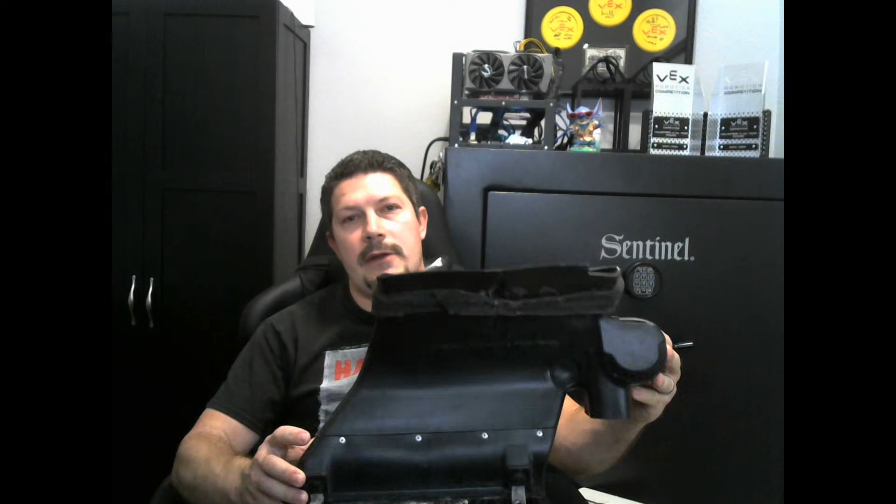I'm just currently working through creating the duct. Here you've got the factory duct, and you see it's pretty complicated. So I have to essentially recreate this with this aspect mounting to my much larger intercooler. It's going to be very similar to the other air ducts offered with the Australian ones, but that's something I have to design and fit to my particular intercooler core.

So that's one thing I'm doing. I still need to design an AST relocation and a couple brackets, but as far as the intercooler, it is complete, and I'm going to reveal that in some future episodes.

But let's get to the CFD analysis. Essentially what I did was I took a bunch of pictures, as many pictures as I could find, like what I showed with the last video, uploaded them into CAD. I took the dimensions I knew of the cores. You can put that into CAD and essentially create the size. So I got the dimensions as close as I could without having an actual unit in my hands.

I recreated the end tanks. For CFD, I only ran the hot side core because that's the core I'm really worried about. The top tank design on the core, if you missed it, tapers down on one side of the core to allow the cold side outlet of the front core to pass over it. So to me, that's a restriction and doesn't allow enough airflow to go through the core.

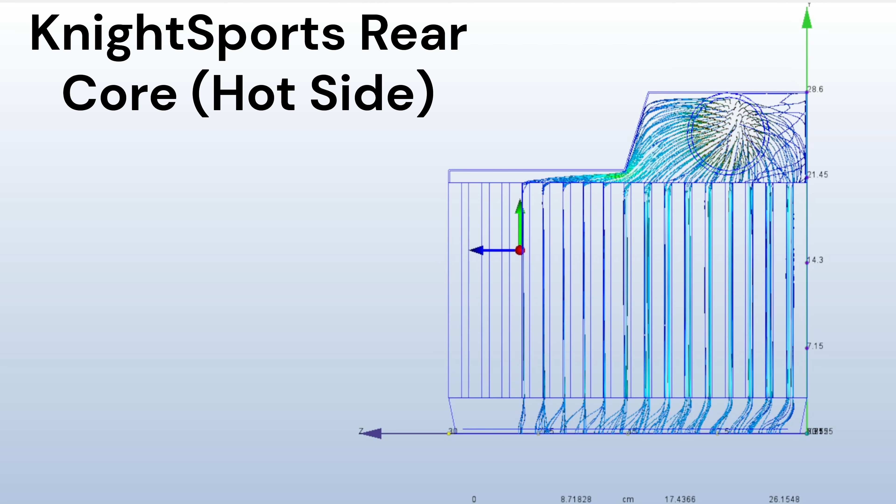The first intercooler I tested was the KnightSports. Here you can see the shape of the top tank design. You have flat cut tank pieces here - there's no smooth transition. Looking at the airflow here, you can kind of see where that's at, but this pretty much confirmed my hunch. You can see how little of this core is actually being utilized.

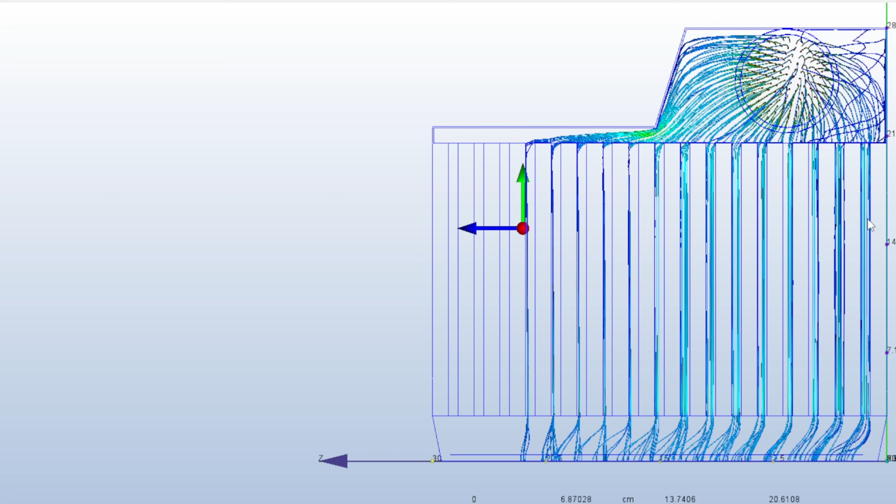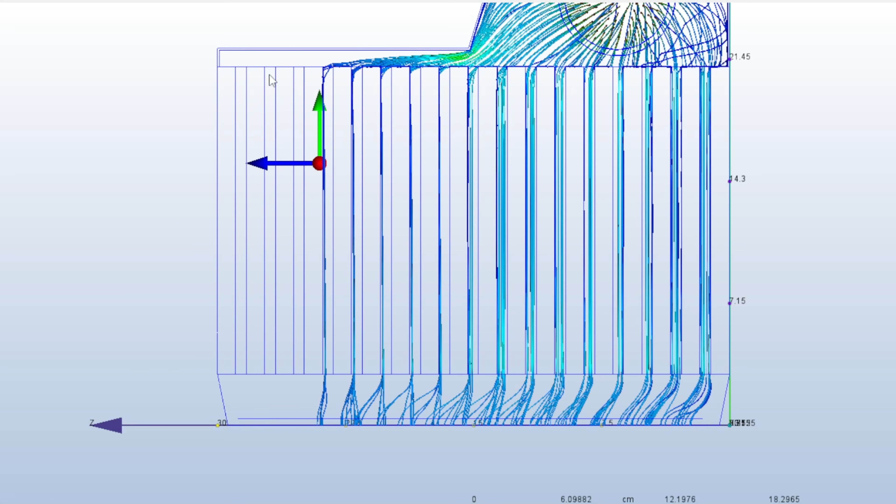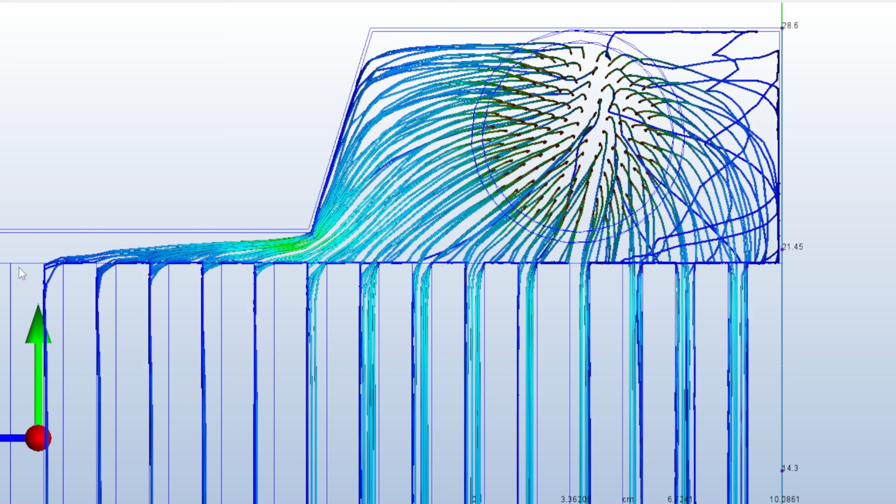This core doesn't seem to have any problem flowing, but even down here you can see that since you have a lot more volume on this side, when it exits this rear core, the airstream seems to be pushed to the left a little bit because there's no real volume coming down here. Now I'm sure you do get some airflow here. I only ran so many particles through here just so you can get a better visual. If you run more particles, it gets really convoluted and hard to follow these streams. So if I crank this up, you will see more coming down here, but you can see there's a pretty significant difference in airflow.

I think that's just the downside of having this type of tank design and having your cold side come out of here.

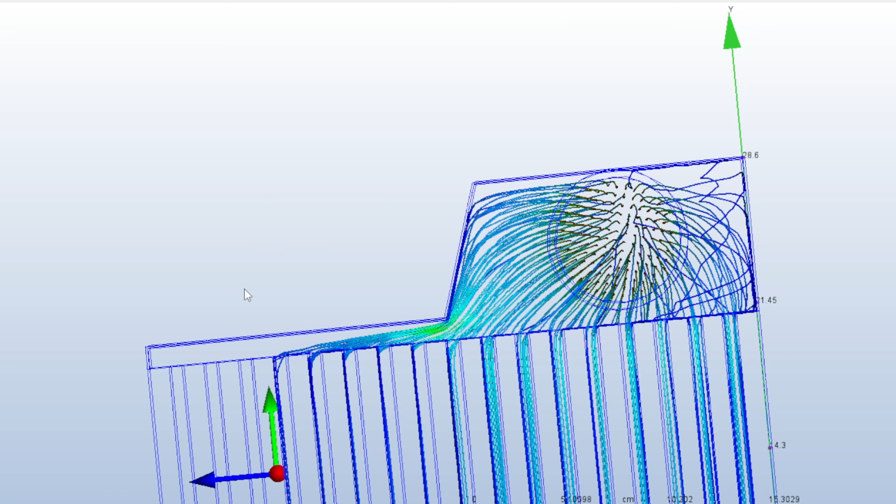Now let's take a look at the Australian models. This is significantly better than the KnightSports, better than I expected, but I still think there's some to be desired. You can see down here we're still getting more volume on this side because as the air exits the tank, it's still being pushed to this side.

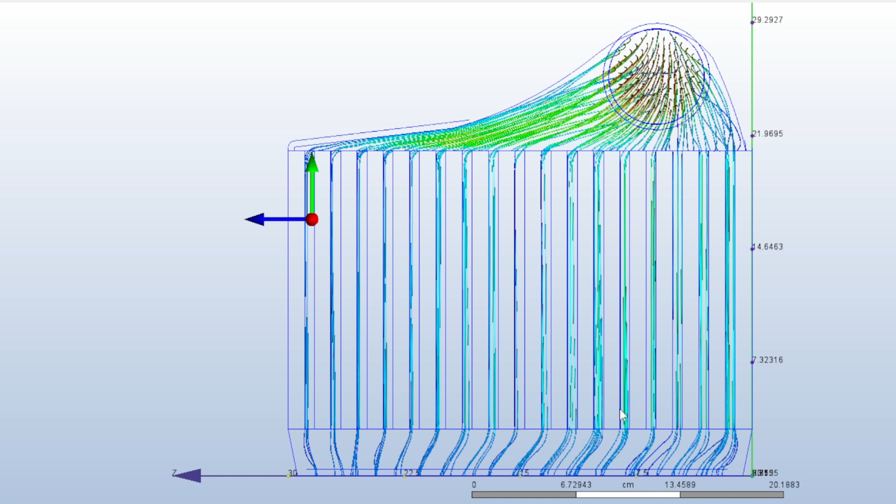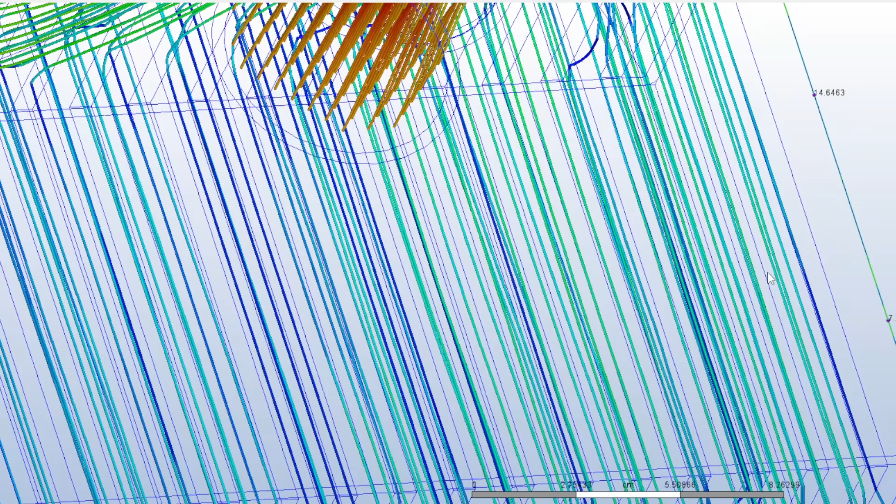And when you zoom into these far ends, we're getting significantly less airflow particles to probably this quarter of the tank. You can see how much more on this side we're getting per channel than this far side. And that's, like I said, it was my hunch.

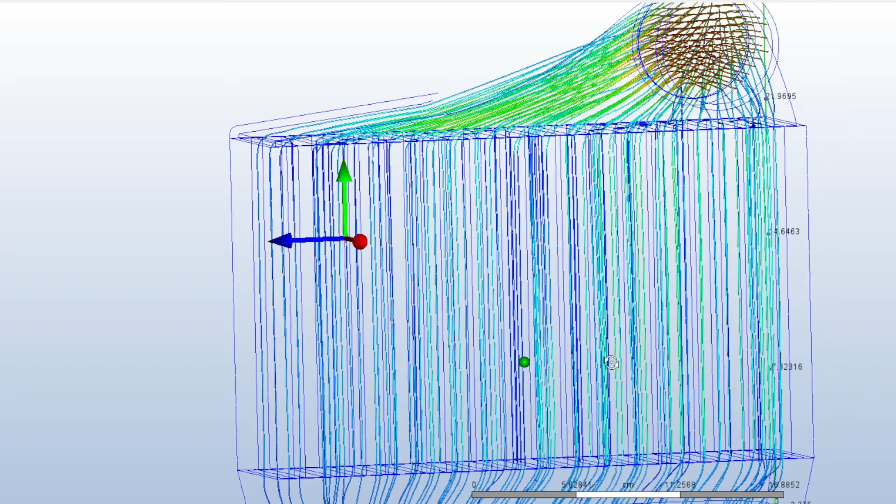It's to be expected. This is definitely a more efficient core, or tank design I should say, than the Night Sports, but I think for the money I would like to utilize the entire core appropriately.

You can probably fix this by welding in one of those channels up here like I mentioned in the previous video, but ultimately I think you're still going to run into issues with having your cold side outlet pointed right here.

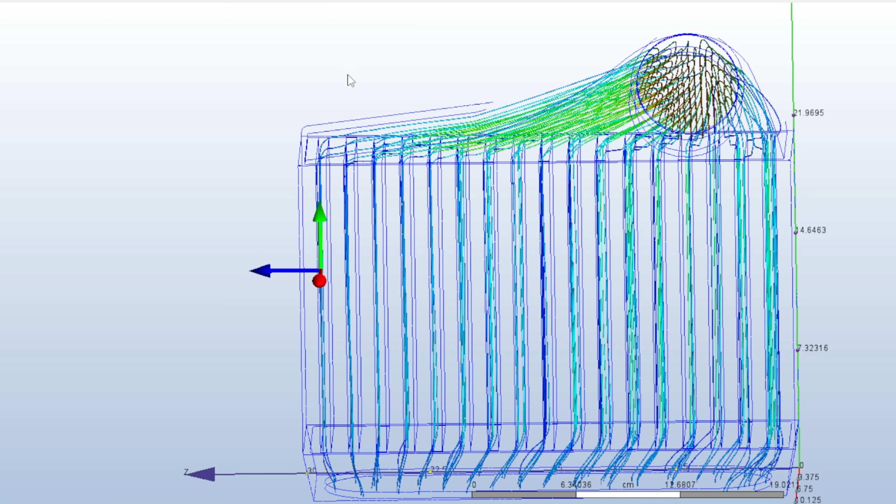From the top view again, you can see how much more volume you get on this whole part of the core versus down here.

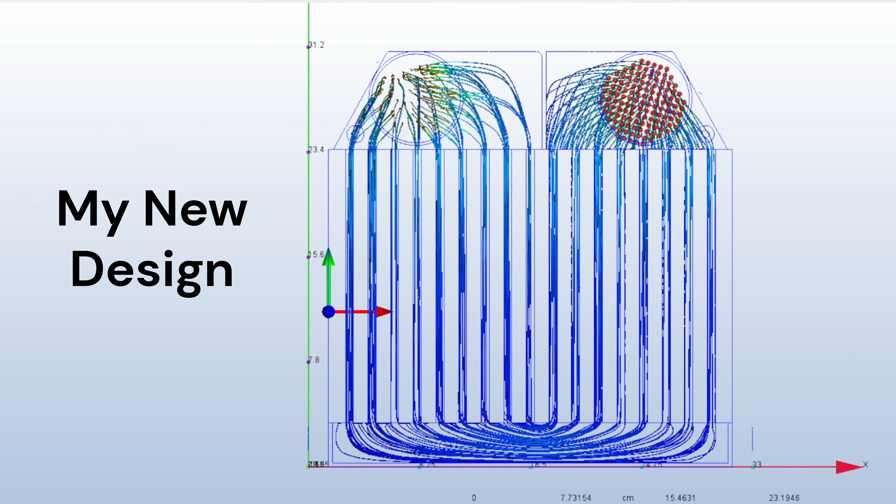That brings us to my design. I chose to use a single large core versus two cores stacked on top of each other like the other U-types.

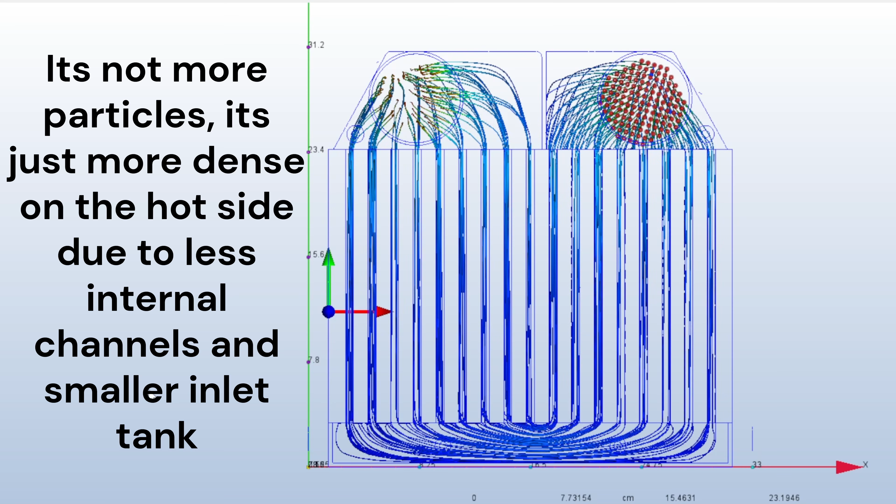And the first thing you'll notice is why are there so many more particles on the hot side than the cold side? That's because the core I chose has an odd number of cooling channels that the air actually flows through. So the way I designed it, the hot side has fewer cooling channels here, and then it expands into the cold side, which has one more cooling channel.

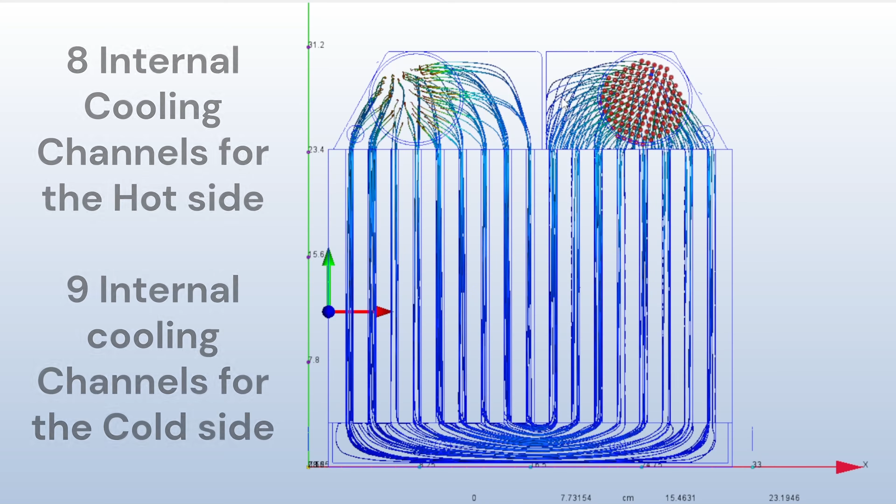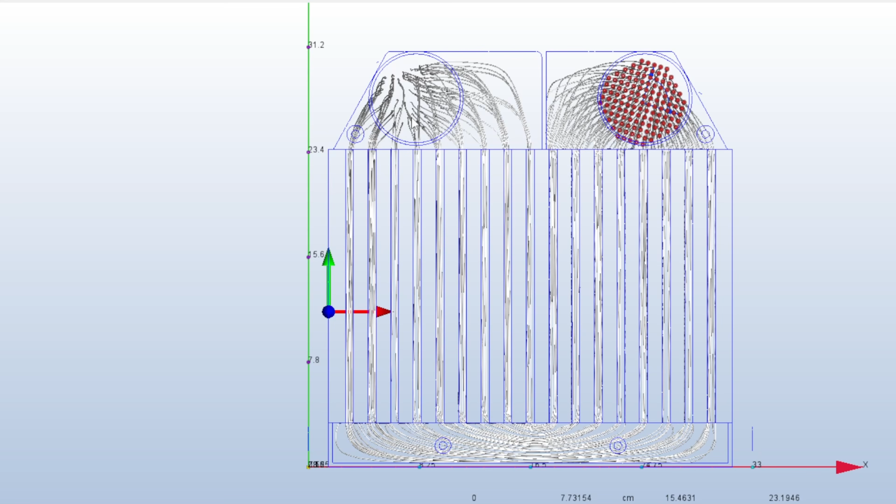I could have done it either way. I could have made the cold side the smaller side, but I chose to err on the side of thermodynamics. Anytime you have a compression of a fluid, and air is a fluid, you're going to heat it up, and anytime you expand it, it's going to cool down. So I figure this is probably going to be the higher pressure area, and it's going to expand down here in the lower tank and come up to the cold side. The change might be negligible, but that's just something I chose to do.

I think this core is overbuilt for my needs. It should be able to handle over 500 horsepower, so this could be good for those single guys. I guess we'll see when I get on the dyno and when I get some actual data coming into this.

But you can see from the CFD, I'm getting equal usage out of the entire core. I'm not only using part of the core like what we saw with the other two designs.

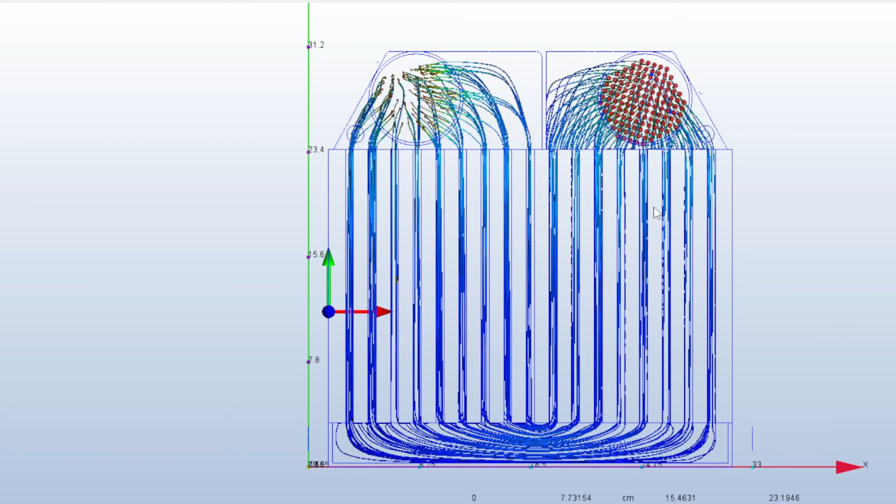Even when you go from the top view, you can see I get real equal airflow throughout both tanks here, and that's exactly what I want, through all the channels.

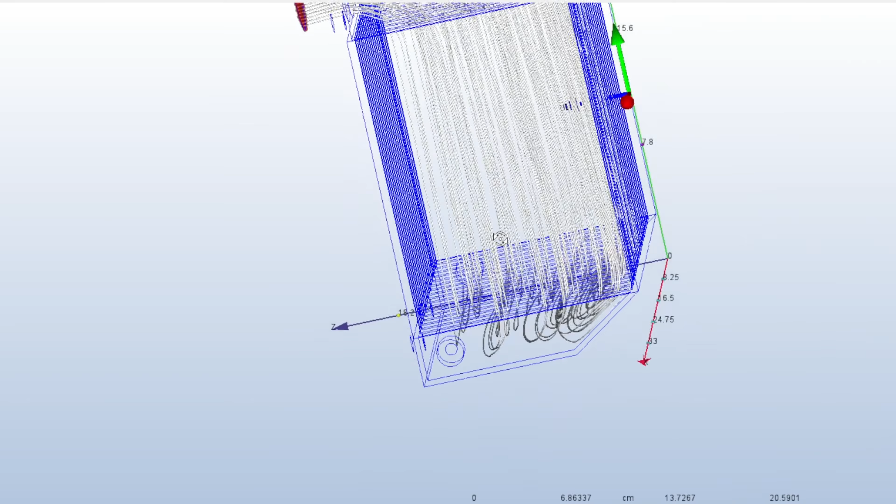It's hard to do on two screens, but you can see this is pretty good use of the entire core. This is to be expected, and you see this with pretty much all intercoolers, but the main thing is we are using all the channels equally across the entire core.

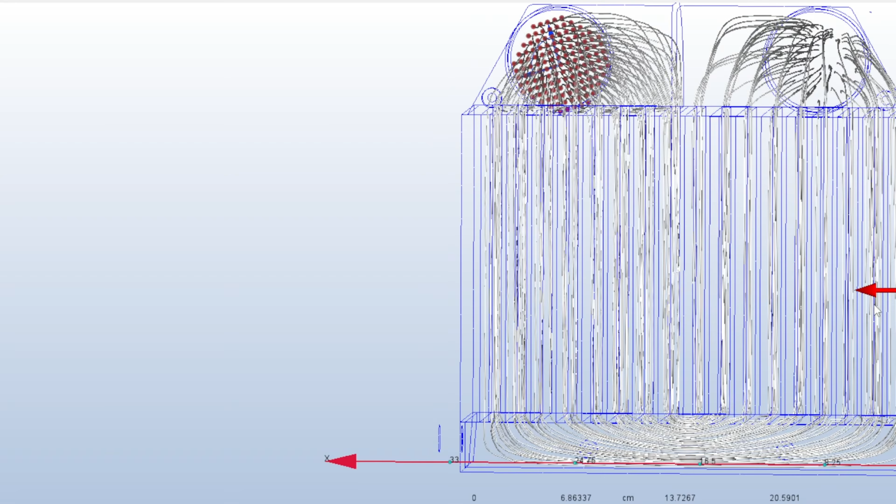So I'm excited about these results. We won't know until I actually get it in the car, get some numbers and whatnot, but I guess we'll find out soon enough.